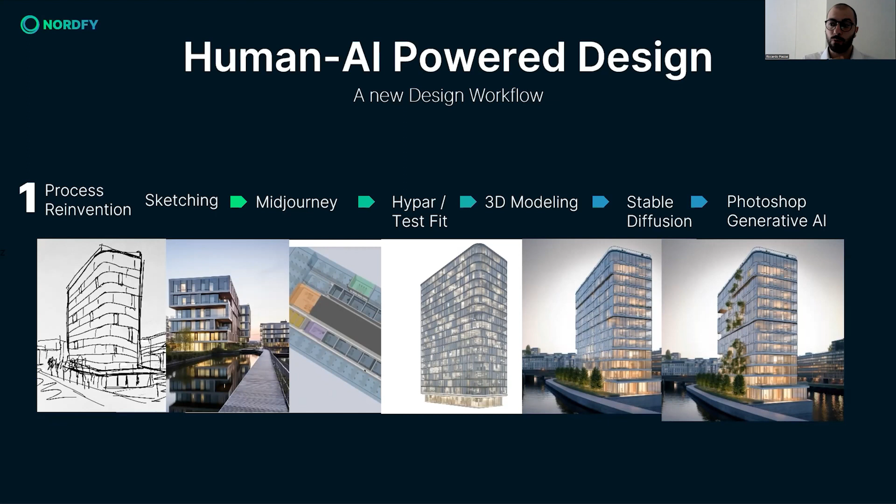And then there are other AI-driven tools that are not only using AI, for instance Hypar - we're going to see a demo of it where you can do test fit. So from this test fit you have a 3D model, and then you can refine your design.

It's fundamental to work together with the design intent, the narrative, the storytelling, but always with this continuous stream of data management and computational analysis, because we don't want to base our design only on numbers and images of aesthetic. We want a sustainable building, a performative building. So the design process must always be together with these other aspects that maybe were not clearly described here.

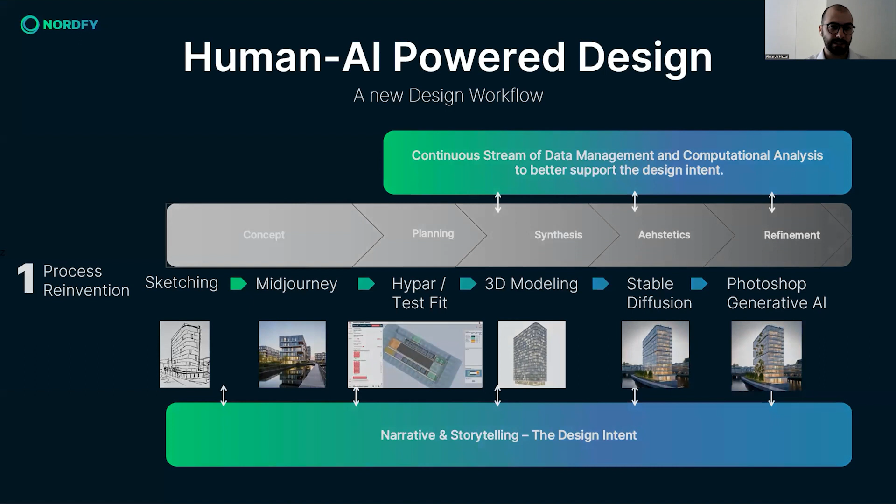Where would these new processes, these new reinventions of the design process lead? Well, if you look at the current design process, we start with a brief and then different design options. Then you take some design decisions, remove some design options, bring the level of detail of this design to the next level because you have client meetings, milestones, deliverables, and you discard design options until you arrive at the end with only one possible buildable solution - your final design.

With the new mindset, what happens is you feed the machine with some parameters that are fixed, that we know we have to respect. Those parameters can be any kind - program, raw, regulation, any kind. Then there is a first filter, which is AI assisted - this human working together with the machine - and you have a bunch of design options that, pay attention, are all equally good, maybe different, but in terms of performance equally good because they're parametric driven, data driven. So you can bring to the next stage multiple design options, choosing one of course, but multiple options with the same level of complexity.

So to conclude, I want to quickly showcase a few tools. One is Hypar. Hypar is really, really powerful - check it out if you don't know it - because you don't start the project from a blank sheet. It's not starting from scratch.

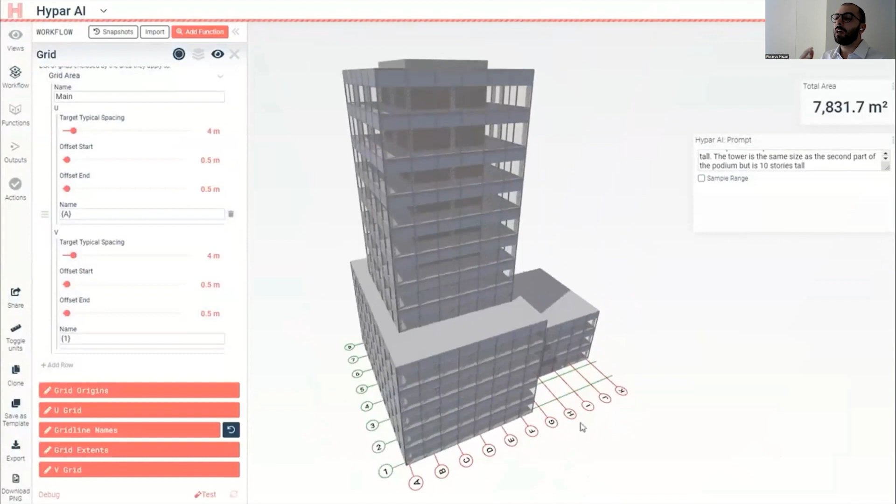First operation, text to BIM. So you describe the massing, you describe the architectural components. You can say, I want this structural grid with this dimensioning, I want a podium plus tower, I want to move the tower, I want to reshape the core, I want to move the core, and so on and so forth. So it's all text driven.

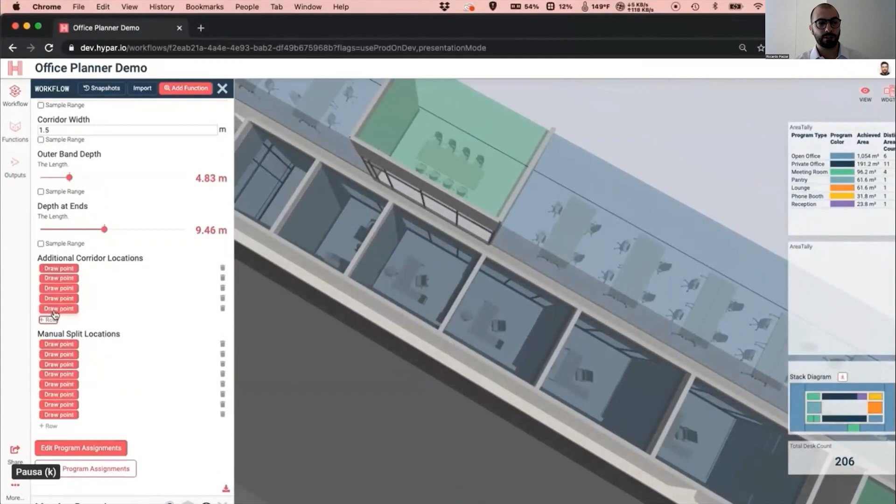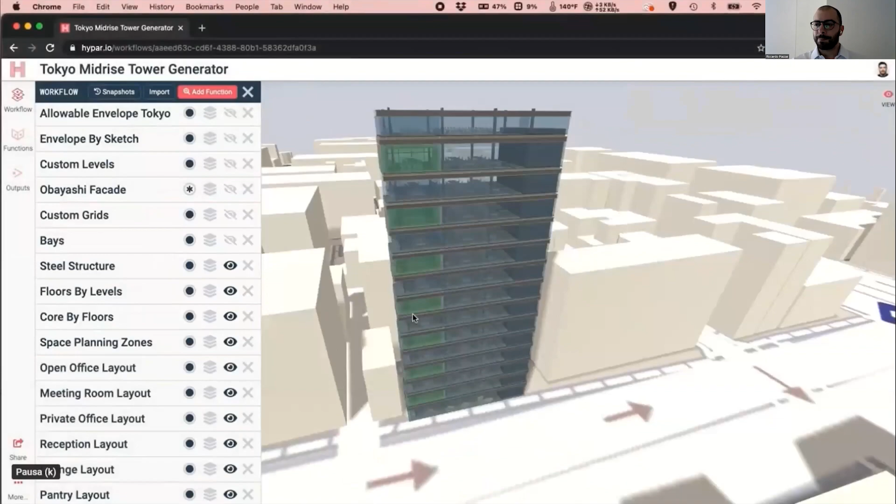When you have something that's more or less what you want, so you're not really starting from scratch, you can perform in the same environment your test fit. You can go a little deeper with detail and understand, yeah, I can fit this program with this layout, or I need to make modifications from what was originally generated by the machine. You start to curate the design, but with information, right? After all these processes are done, you can import this data into your authoring tools, in this case Revit, and you have your Revit family - you don't go from scratch, but you already have your drawing set, we could say.

Another one, just to tackle another problem, is Blueprints AI. In this case, you have kind of a chatbot to generate your drawing set and your BIM model, and you can modify the design and the drawing based on text. This is really powerful - for instance, I can say, I don't want this garage, or I want to add extra storage, or I want an L-shaped living room, open space with the kitchen, and so on and so forth.

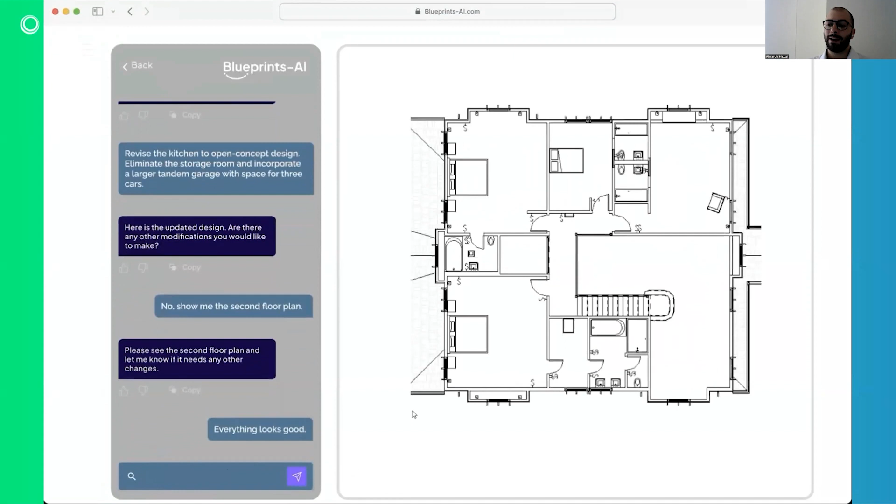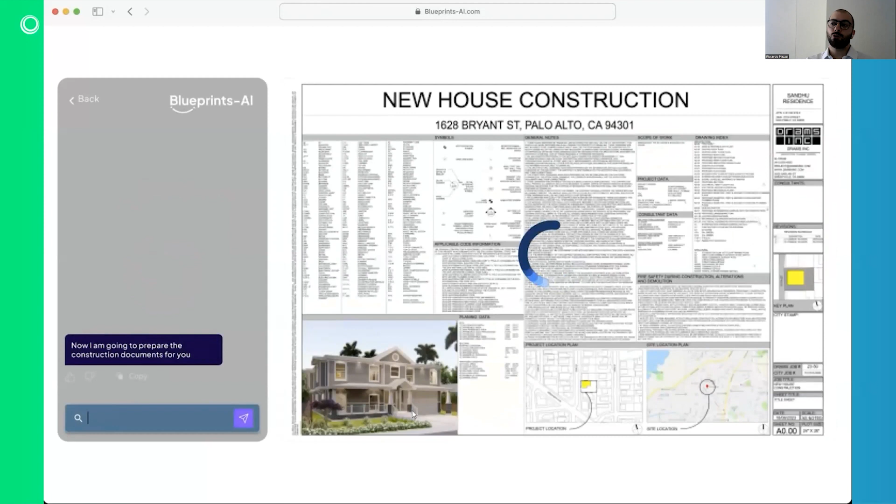When I'm really happy with my design, I can make the software generate a more complete BIM object and produce all the documentation - really an entire drawing set based on the stage of the project, whether it's schematic design or development design or whatever it is. So if the direction is this one, this is really scary as well, I would say.

And then we have, of course, some form of Lunchbox ML.

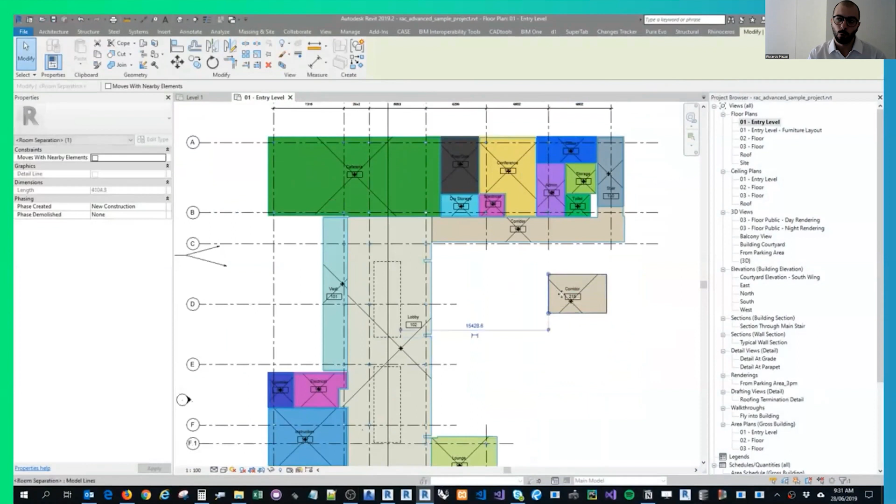Here, for instance, is a more integrated version with Revit, where changing the geometrical relationship of the boundary, the machine learning can predict what room that is going to be. If it's very narrow, it's going to be a corridor. If it's a specific square meters with some dimension on a side, it's going to be another kind of rule, and so on and so forth. So the prediction applies to Revit use cases.

There was this one, I'm sorry the graphic isn't the best, but it's a very simple starting point that I saw from Gokar Malik at the BIM Coordinator Summit, that I really want to show you because it was really nice to me. What he did was import geometry. This is just math, where in a human mind, a column, a slab, a wall has specific geometrical characteristics or specific dimensions versus the others. For instance, a slab is really wide, really deep, but thin proportionally speaking. He wants to predict what kind of element would be assigned to a 3D object in the space.

So he wrote a few lines of code, and then he mapped the situation so that, for instance, if a column is in its normal vertical position, it's considered a column. But if you rotate the column horizontally, that could be read as a beam if you don't have any other information, just geometrically speaking. So he wants to train this model where the output 0, 1, 2, and 3 means 0 is a wall, 1 is a floor, 2 is a column, and so on.

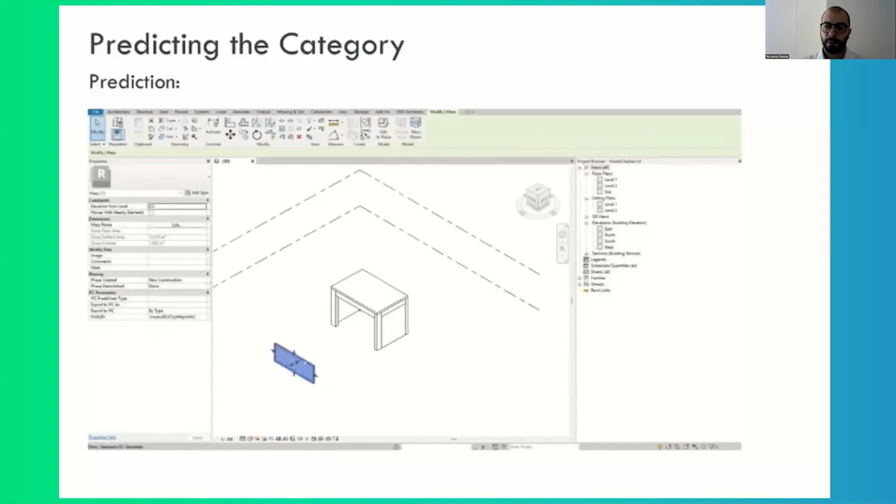And of course, when you would manually update the geometric relationship and the dimension of one of these elements, the model is going to predict a different output. So for instance, now this wall has changed with a different geometrical proportion, and the model predicts that this must be a beam. If now we extend this surface to be more horizontally spread, this is going to be a floor.

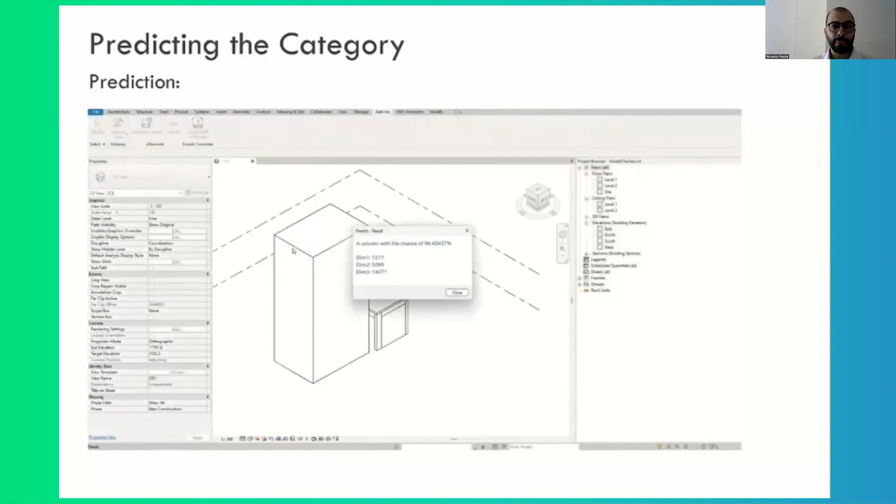Now, the interesting part is that when the geometry, in this case, is so different compared to the numbers he used to train the model, it's still able to understand the relationship. So this is a column, even if it's really exaggerated, because the geometrical relationships are those.

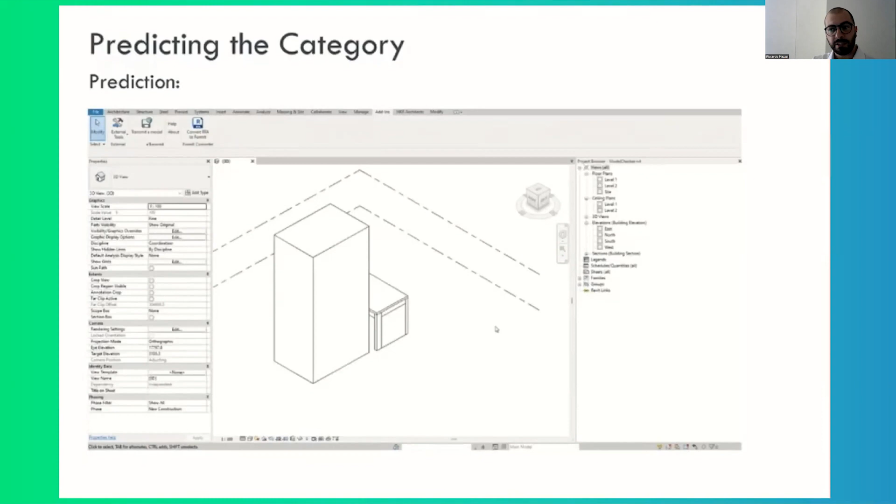Now, imagine if we start to have this kind of control in Revit, where everything is a label, everything is a parameter, everything is a text parameter. I mean, if the model can also predict the parameters to fill in, it's really powerful to me.

So I want to conclude this presentation with this sentence: creativity can be defined as the production of new knowledge from already existing knowledge, accomplished by problem solving. And that's because I think BIM, AI, and the human-machine relationship are really going in this direction, where it's data-driven, process-driven, and the value of prediction coming from existing knowledge that can generate new knowledge is going to be the future.

So yes, that was it from my side. I don't even know if I was on time. Maybe it was a little bit long. I'm sorry for that.